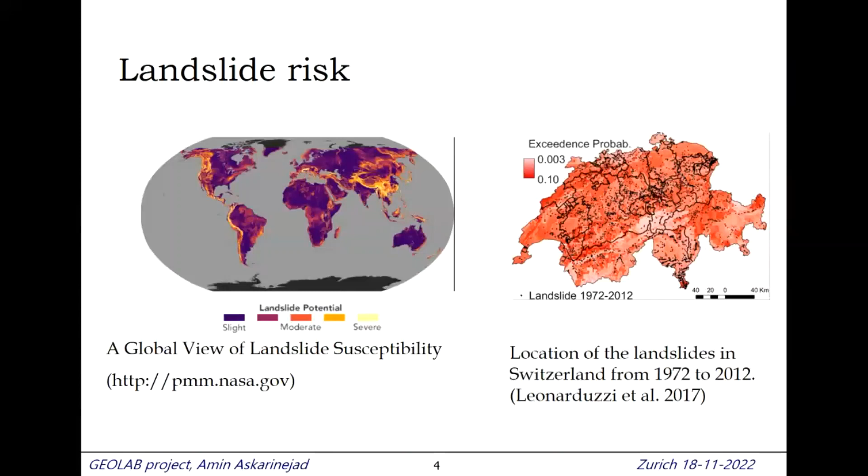With current predictions of global climate change, we would expect, unfortunately, more dots on the maps at a higher rate in the near future, along with the increase of population and attractiveness of mountainous areas for infrastructure or settlements. Therefore, we need a better understanding of triggering mechanisms.

This is an example from Japan where the authorities could predict that this landslide was going to happen, so they blocked the road. Fortunately for us, they also put a camera there so we have footage of this landslide. Because it was predicted very nicely, and they could know the extents quite well, there were no casualties associated with this. I have a YouTube video of that—I hope it works, let's see.

You can see that it's quite a large area that was affected by this, and this road—if the authorities could not predict it well—would definitely pose a huge impact on motorists on the way. Going back to the presentation.

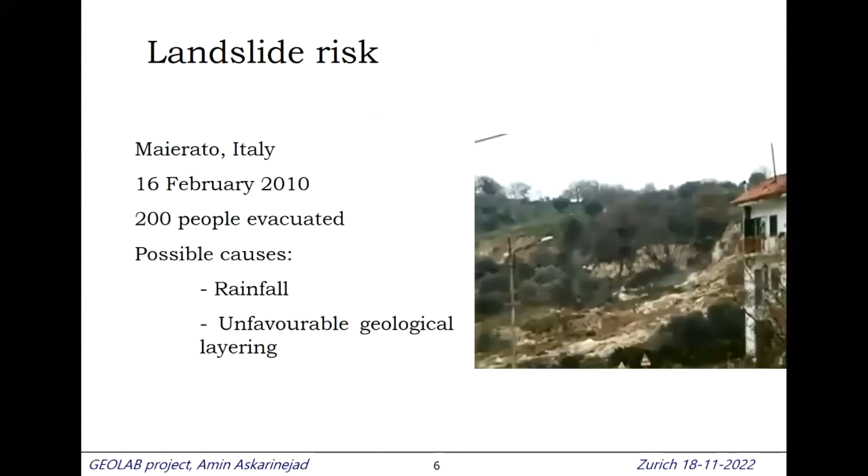The second example, since I just realized the video doesn't work, is from Italy. This landslide caused the evacuation of about 200 people, and the cause was rainfall and unfavorable geological layering. We'll discuss a bit more what these unfavorable geological layerings mean. In very simple terms, a landslide happens when the driving forces are larger than the resisting forces.

Normally the driving forces are more known to us than the resisting forces, because soil is a complex material, and therefore we need perhaps to work a bit more on understanding the resisting properties of the soil, especially transient unsaturated soils.

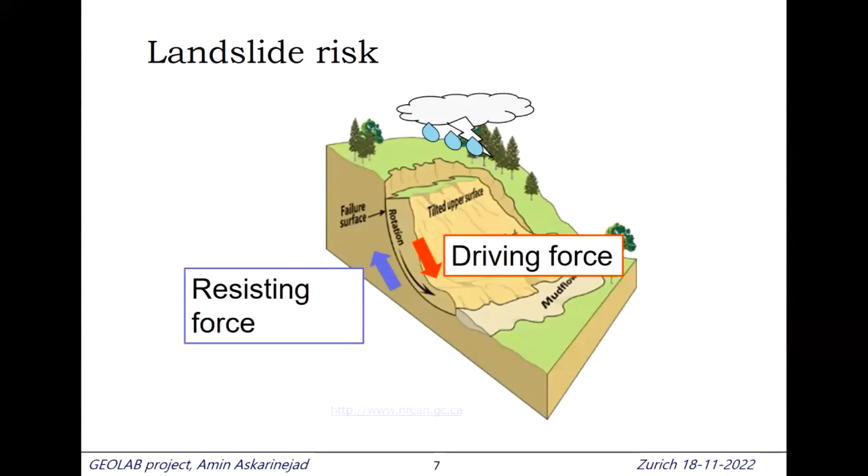Looking at two grains that are below or located under the water table, we have these repulsive forces of pore pressure, basically. These pore pressure forces are acting in all directions, perpendicular to all of these grain surfaces, and in fully saturated condition, this repulsive force works in a way that the two grains are moving away from each other.

So basically, if we look at the definition of effective stress, it's total stress minus pore water pressure. But when we have negative pore water pressure, or the grains are located above the water table...

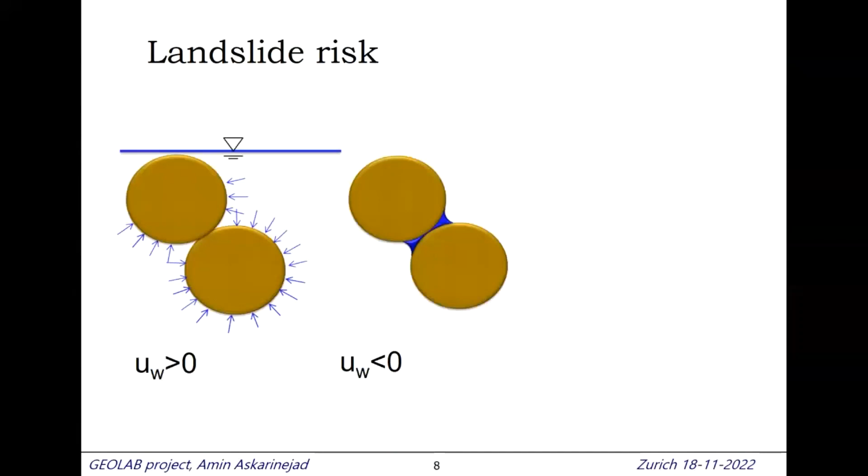This is basically the cause that a lot of the slopes are stable and become unstable when it rains. So when we move from this situation to fully saturated situation...

In terms of equations, or how we can mathematically in a very simplified way describe this phenomenon, you know about the shear strength of the soil, which is a function of effective stress. But in this equation, basically for unsaturated soils, we separate the effect of total stress and the suction.

The first term is basically the so-called total stress minus pore air pressure, and the second term is called the apparent cohesion. This is not related to the total stress; it's purely related to the amount of pore water pressure. And this parameter chi is basically a function of degree of saturation.

A lot of researchers, for simplicity, just assume that this value of chi is equal to degree of saturation. So when it rains, basically, before rainfall, this UW, the pore water pressure, is negative.

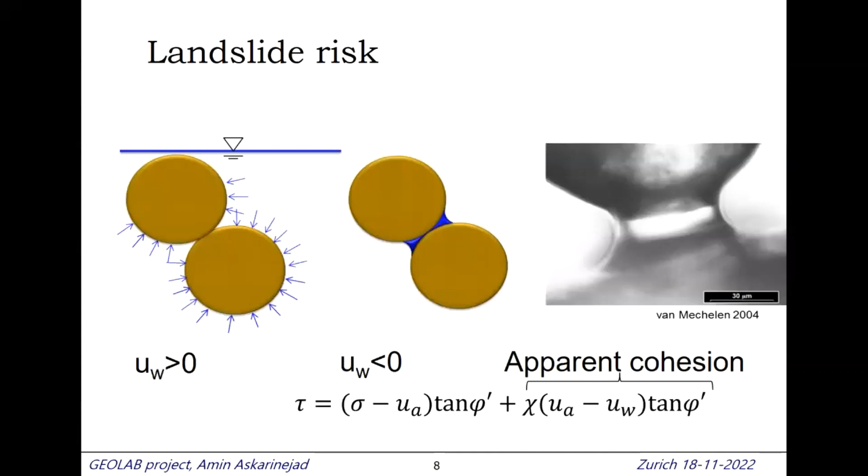But of course, that is just looking at two grains; in reality, we have a very complex situation. So if we want to predict a landslide is going to happen in a region or not, there are a lot of points that we need to look into.

The first one, for example, is that in a lot of cases, we assume that the bedrock is parallel to the slope surface. And in most of the cases, actually, it's not the case.

Also, bedrock, we normally assume that it's impermeable, but not only is it not impermeable, but also sometimes you have this unfavorable geological layering that would have actually some water coming out of the bedrock, and this is called exfiltration.

The bedrock might have a dip in the shape, so therefore you might have some locally saturated zones as well, or you can have some lenses of soil with different permeabilities. Therefore, you have a really complicated interactive system that you need to take into account if you want to make a prediction for a landslide.

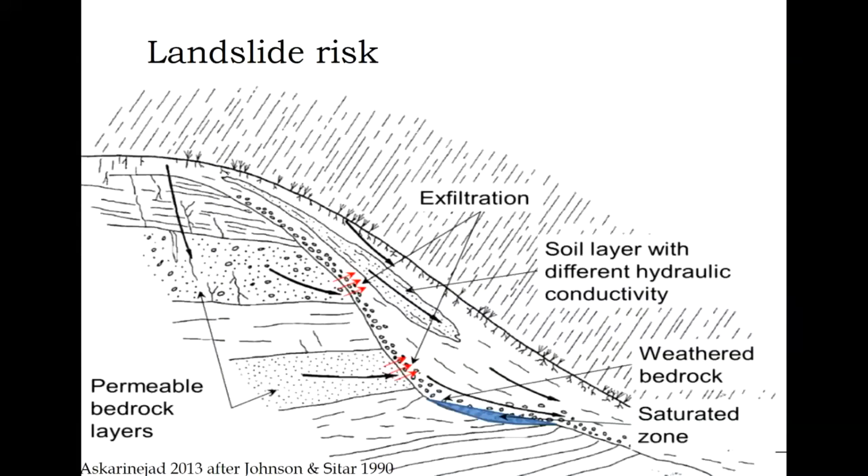So the major questions that in these sort of studies we need to take into account: firstly, what are the hydromechanical responses of the ground to rainfall? So if you have a slope, by hydro, I mean how the pore pressures change, and mechanical means how the effective stress and hence the shear strength changes, and also maybe some volumetric changes.

The second question, especially important for authorities, is that can we have some indications of the failure before it fails, of course. Not only indications about the time, but also indications about the volume and also the runout.

So about the timing, there is a lot of research that you might be aware of, this keyword early warning system, that is basically based on measurements and understanding the soil behavior to interpret those measurements.

Then a bit more on the interactions: what I mentioned about the geology and hydrogeology interactions with the soil mantle is important, and also what recently, I mean since a couple of decades ago, but recently, maybe during the past 20 years, has taken up is about the effect of vegetation.

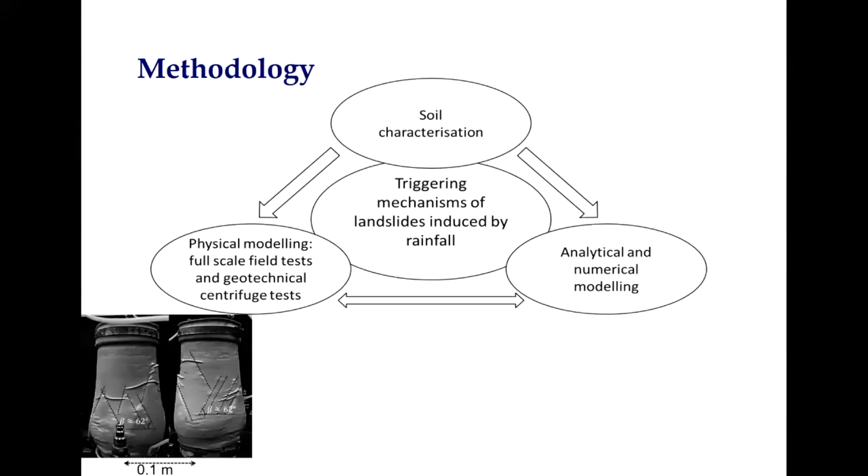Soil characterization can be done in many ways. What I did was use a large triaxial test done together with Alex Marin, who is here—he actually took these pictures. Then we can perform some full-scale tests, which I'm going to talk more about. We can also perform centrifuge tests, and of course, some numerical modeling.

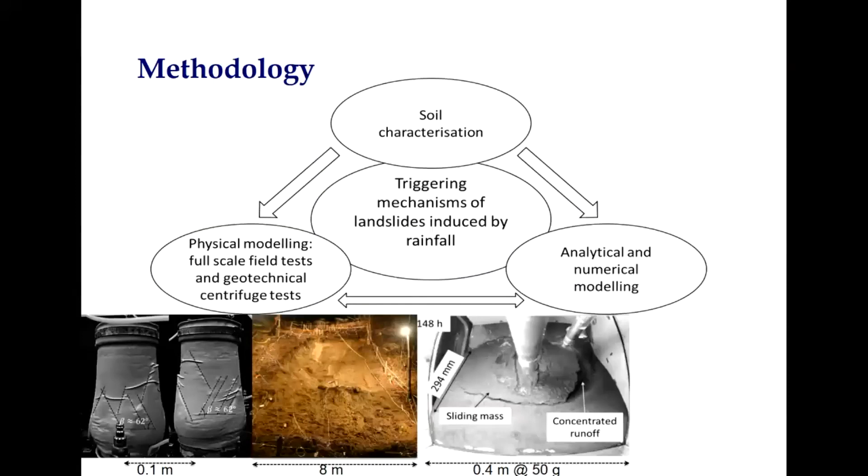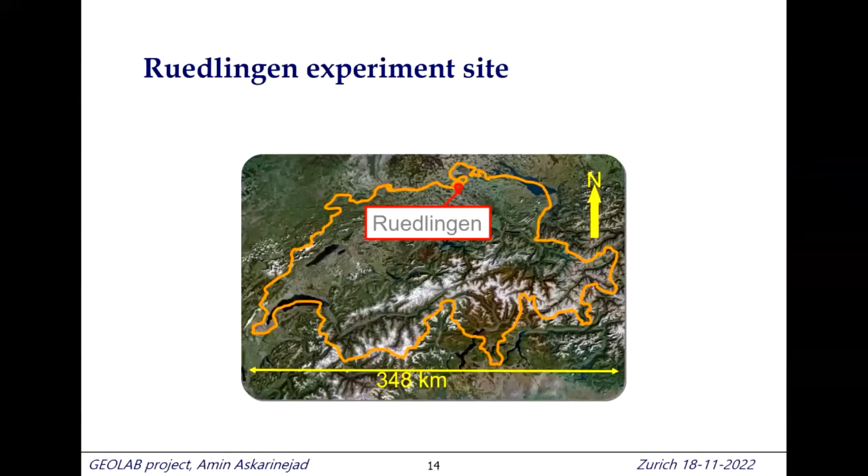So let's have a look at the field experiment. We chose a slope located in the northern part of Switzerland, in the beautiful canton of Schaffhausen, at the banks of River Rhine. This is an aerial photograph of our test site, showing the River Rhine flowing from the canton of Graubünden all the way to Germany.

You can already see from this figure that there are some signs of movement in this region. The Rhine has eroded the toe of these slopes, and therefore you have some retrogressive landslides—you can see this depression close to the village called Buchberg on top there. You can see signs here and some others here, and also signs of shallower landslides along this very beautiful hiking route. If you are here tomorrow and the weather is good, I can really recommend having a look.

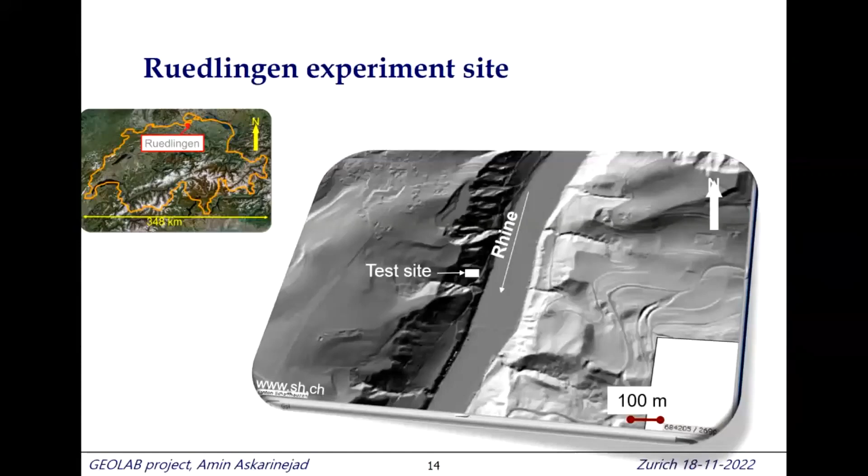Some more obvious signs of movement in this region: you can see that the trees are not always vertical, and this is a sign—you can see that they are bent, which shows that the base has been moving downward. So it's a creeping slope along the banks of River Rhine. Or you can see outcrops where the bedrock has been exposed, meaning the soil on top has slid down.

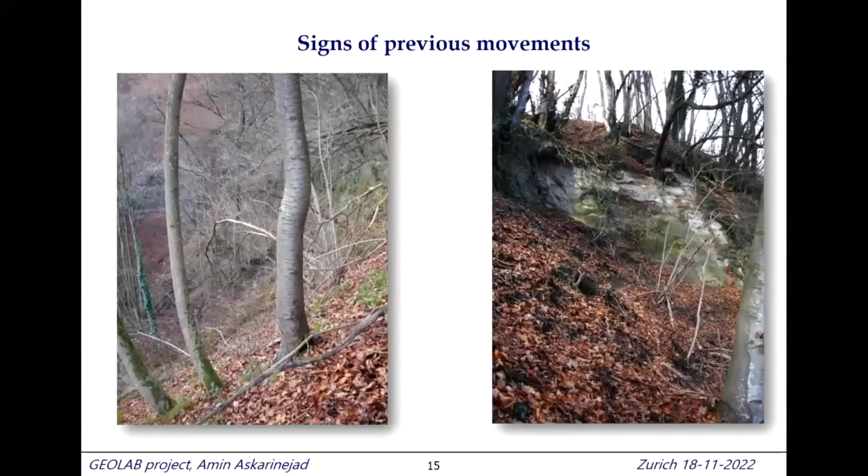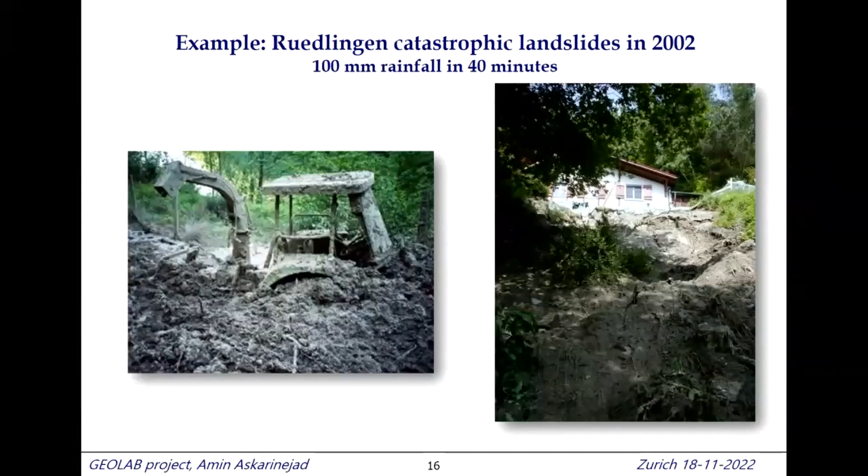Some very obvious signs of previous landslides—for example, this is a landslide, or series of landslides, that happened in 2002 in this region after 100 millimeters of rain over 40 minutes. This was really an extreme case, and you can see some cracks at the base of this house here, and some mudslide occurring in this region.

Starting with the first part, soil characterization: the first thing we did was go and take some completely disturbed samples and do a grain size distribution. We took samples from different depths of this slope—I'll explain which slope it is, but it's in Ruedlingen. According to the unified soil classification system, it's medium to low plasticity silty sand.

We performed a couple of conventional consolidated drained triaxial tests, and the constant volume internal friction angle was measured to be 32.5 degrees. I also performed some more advanced stress paths, which I'll explain in more detail, and the internal friction angle at failure was measured to be 36 degrees.

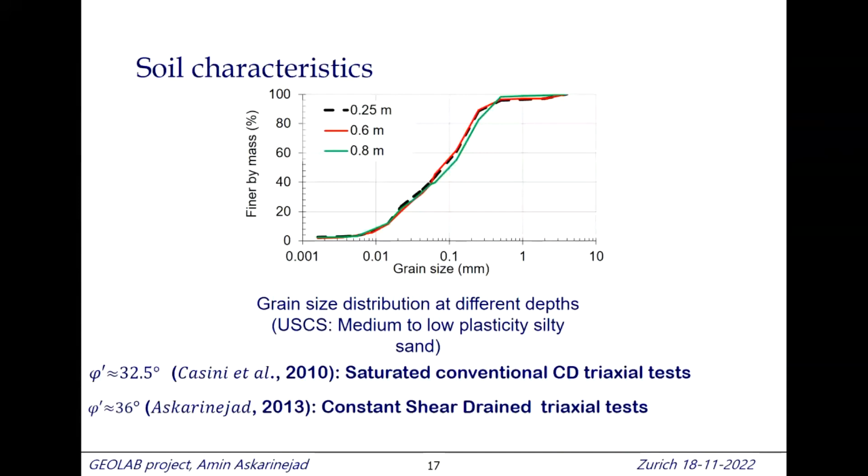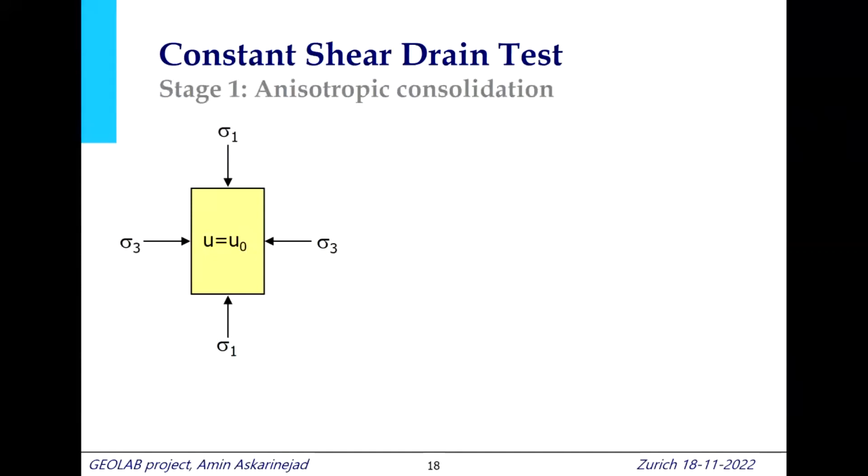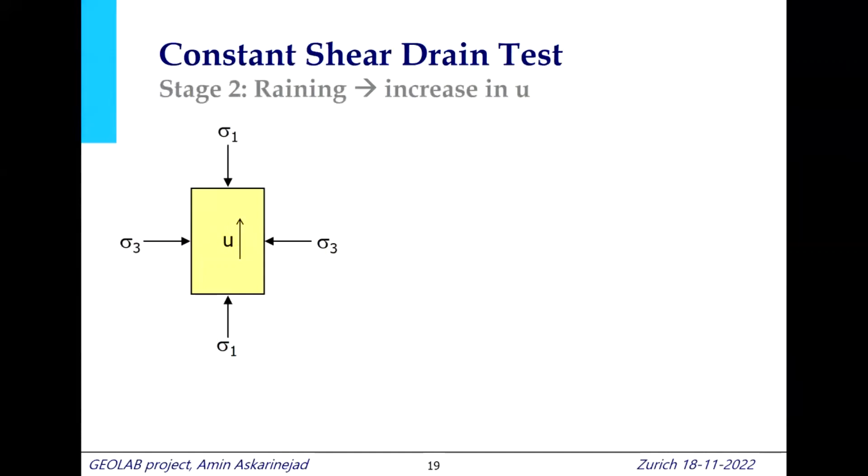For these advanced stress paths, let me explain shortly what I mean. When you have an element of soil already in a slope, it experiences shearing—it's not failing, but it's not without shearing either. Therefore, to prepare your sample, you need to consolidate it in an anisotropic way, so you already have sigma 1 different from the lateral stresses. To simulate rainfall, you simply increase the pore water pressure in your sample while keeping the boundary conditions in terms of stresses constant.

So maybe I'll ask the public a question: what happens to this Mohr circle when we are simulating this rainfall in the triaxial sample? Does the radius change? Does it move? The radius does not change—pore pressure changes, as we are injecting water to simulate the rainfall.

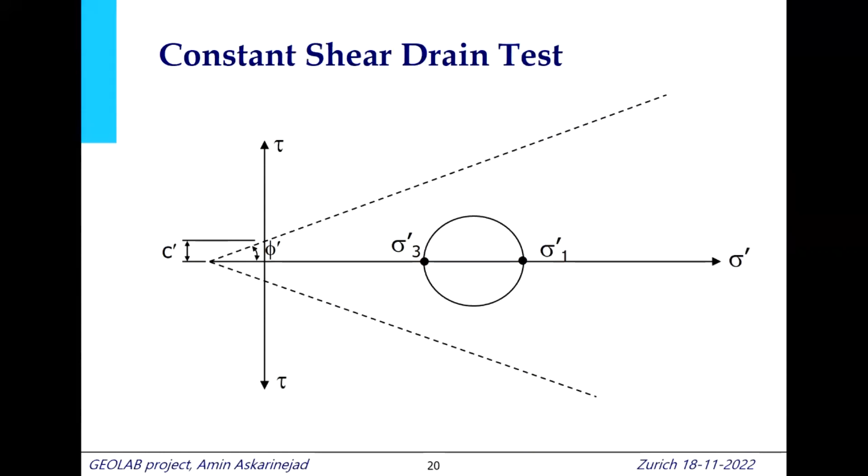The total stress remains the same, but it's moving. It moves to the left, because we are increasing the pore water pressure, so effective stress decreases. We expect that these Mohr circles in this tau sigma dash space basically move to the left.

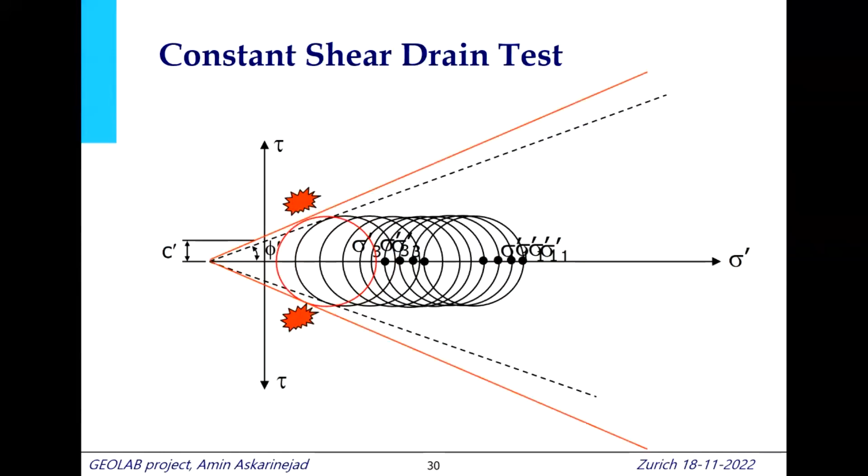According to previous conventional triaxial tests, we expected this stress state to fail as soon as it touches the failure envelope with a phi dash of 32.5 degrees. But surprisingly, it didn't fail, it went a bit further. Because of the lower stresses, we have a tendency for dilation, so the slope was actually a bit more stable.

I had prepared another question, but I leave it for you. Anyway, I'm going to explain it. So to look at this in P-Q space, I've drawn the results here. P dash is the mean effective stress, the average of sigma 1, sigma 2, and sigma 3 — sigma 2 and sigma 3 are the same in the triaxial condition — and Q is sigma 1 minus sigma 3. Starting from this initial point, we increase the pore water pressure as the rainfall progresses, and this red dashed line is the envelope or failure criterion from the CD test, the conventional consolidated drained triaxial test.

We see that both samples, one a bit looser than the other, went beyond this failure criterion and then failed, both more or less at an eta failure of 1.47, equivalent to a phi dash of 36 degrees. This is indeed because of the lower effective stresses and the tendency for dilation.

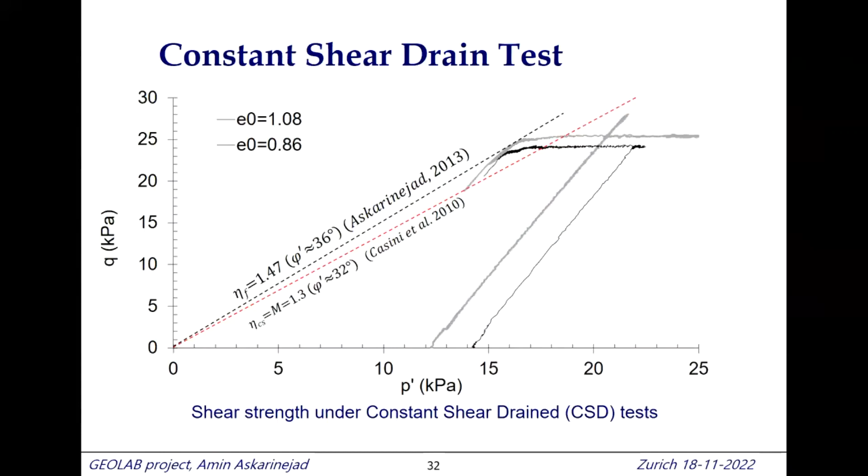Unfortunately, I don't have much time to explain the soil characterization, but at the end of the presentation I've listed some references for those interested. For this sort of question, the hydraulic properties of the soil are very important — for example, unsaturated conductivity or water retention curves that we measured — but due to time constraints, I can't explain now.

This is the slope that we chose to fail in order to induce this artificial landslide. It has a width of 8 meters, an on-surface length of 30 meters, and an inclination of 38 degrees.

Just by limit equilibrium conditions, this angle is higher than the internal friction angle, either 32 or 36 degrees. So it should not be stable according to classic soil mechanics, but it is stable, and we wanted to know why.

On the right-hand side you see the geology. We performed some geophysics and mechanical tests to look at the shape of the bedrock, and you can see the bedrock is actually laterally inclined. Looking upwards, on the right-hand side it's shallower than on the left-hand side. We also realized there were some features in the bedrock: a so-called buttress at the base, an accumulation of old rocks, and also a permeable layer that you'll see later on. We didn't know this existed here.

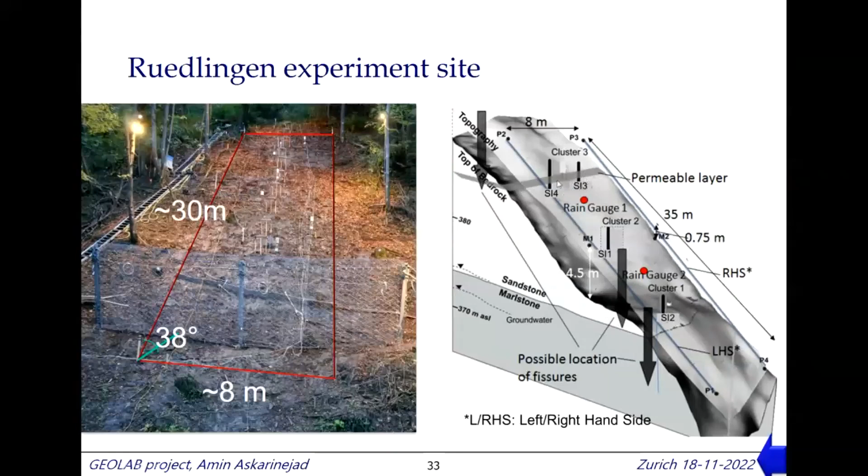We performed some monitoring. Suzanne mentioned TDRs, time domain reflectometers — these are excellent and simple instruments to monitor the evolution of the degree of saturation of the sample, or not exactly degree of saturation, but volumetric water content. If you know the porosity, you can calculate the degree of saturation.

We installed these sensors in three so-called clusters, TDRs from a depth of 15 to 150 centimeters. Using tensiometers, we measured suction at exactly the same horizons. We also measured the surface and subsurface deformations — I'll come back to this a bit later.

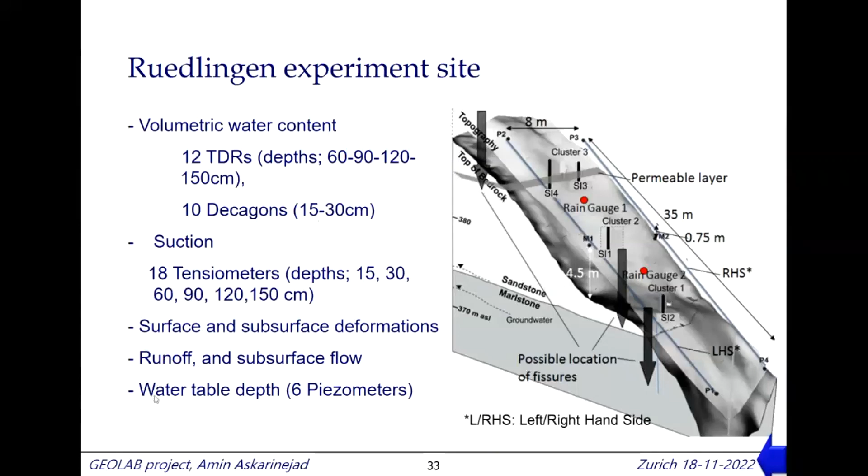We also measured how much of the water we artificially rained is going into the soil and how much of it is runoff. And then we had also installed piezometers.

This is the slope before we did the rainfall. You can see we put these pedestals here with sprinklers, and a huge body of cables running around, all going to this data logger here. A bit about the geology.

So here you can see the general geology of this slope. On the upper part, we have the so-called upper seawater molasse, and on the lower part, we have the lower freshwater molasse. Basically, it's sandstone with some marlstone, so clay layers.

And in the lower part, we saw quite large joints because when the river Rhine was flowing, it decreased the sigma 3, the lateral confining stress, and these joints opened up. Sometimes the joints were around 10 centimeters in width, so they can really work as a very good and efficient drain into the geology.

Also here on top, because we have a change in the geology and the permeability of the layers, you could expect some water coming out of the slope. In winter, in January 2009, when I went to visit the slope, I could see really one horizontal layer of ice forming at the interface between these two layers, the upper seawater molasse and the lower freshwater molasse.

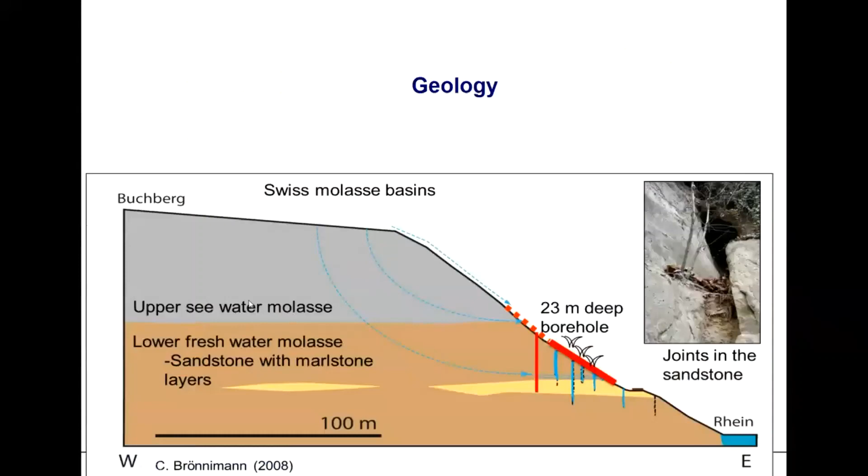To confirm that, we performed some geophysics, so electrical resistivity tomography. And the figures, or the colors that you see here, basically are the values of electrical resistivity of the material.

Electrical conductivity is dependent on two parameters in the soil. One of them is the amount of water that is in the soil. The other one is the amount of ions that you have in the soil. So if the soil is more saturated, then you would have lower resistivity. And if the soil has more ions, for example if you have clay, then you would also have lower resistivity.

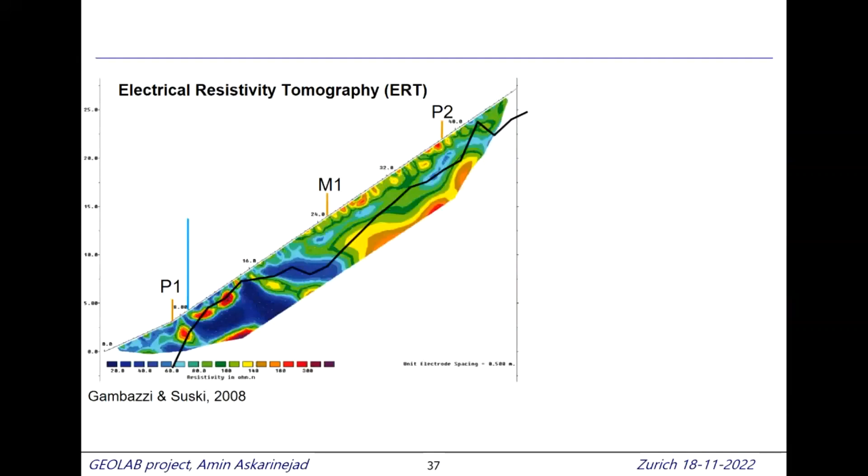So here, when we look at this figure, we can see that the upper part has a bit higher resistivity, and in the lower part, we can see that there is less resistivity. This is the area where basically the marlstone was intruded into the sandstone, and then there was some extra intrusion of the sandstone into the marlstone as well.

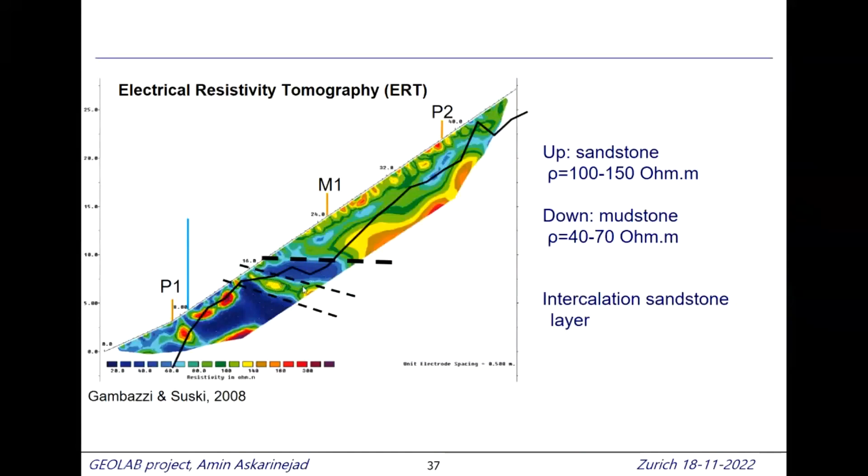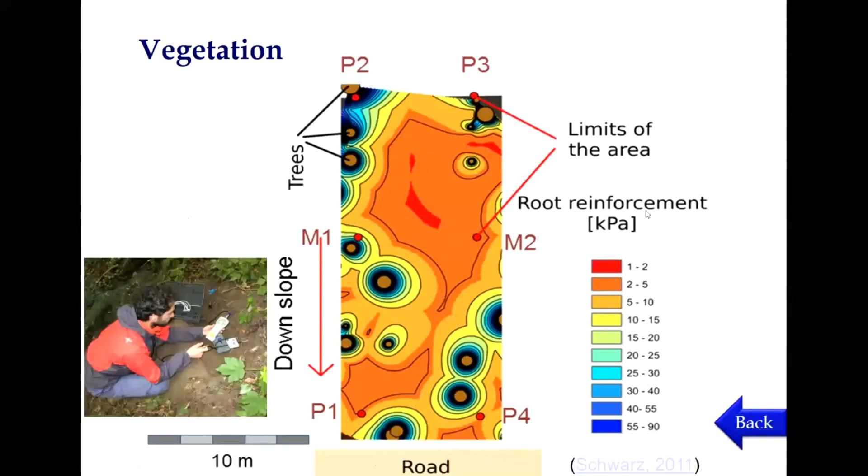One of our colleagues, Massimiliano Schwarz, who is now a professor in Switzerland, did a very good job characterizing the root reinforcements at different locations on this slope. He developed a device that could basically pull the roots and measure their tensile resistance, and so he mapped the root reinforcement on this slope.

One of the important points I explained at the beginning is about the early warning systems. Early warning systems basically work based on measurements, and one of the very important measurements is the displacement. What we wanted to know is how much volume would be mobilized when we have a failure, which means we need some subsurface measurements of the displacement.

And in order to know that, we need to have a sensor. The conventional method is to use slope inclinometers, where you have a casing and you put a trolley which has an accelerometer or tilt meter installed on it. Every now and then, when you are driving it, you stop and measure the tilt. This is a very accurate measurement, but it's manual and very slow.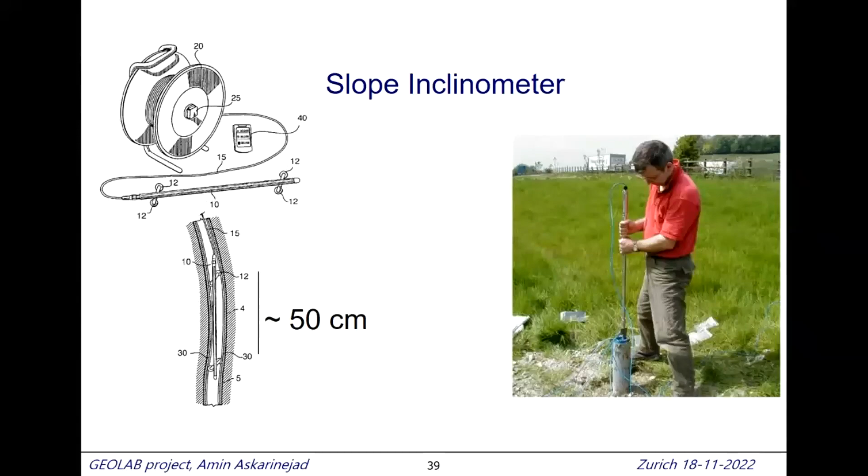When we look at previous experience about landslides in silty sand material, for example this case in Japan, Professor Ochiai, about 4 years before our experiments, did this amazing experiment on the hills. They saw that within 3 seconds, the soil moved 17 meters, so very fast movement.

Also, Andy Take in Cambridge, in the same year, on more or less the same material, performed some centrifuge tests, and they realized that actually their high-speed camera was not very high speed, so they could not detect the movements of the grains very easily.

And also in 2006, 2 years later, Professor Picarelli in Napoli performed some tests, and they also saw some immediate and very fast movements.

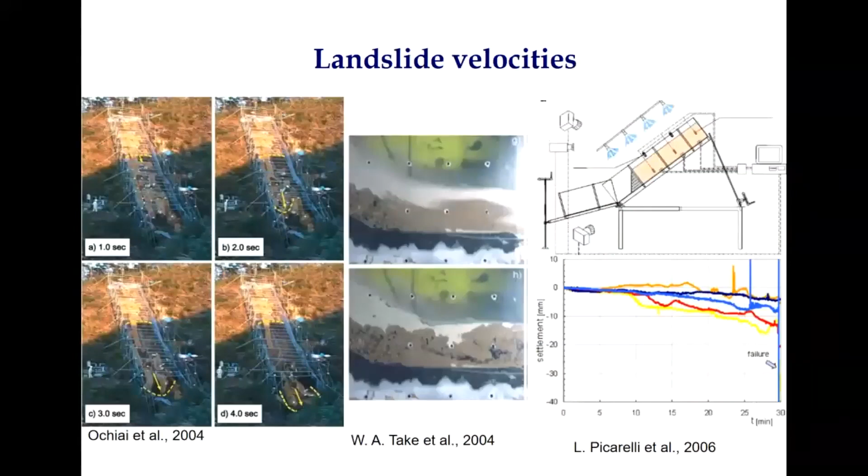So what these experiences told us was that a normal inclinometer is not going to work, for this soil which is silty sand. We realized that the normal slope inclinometer is not the way to go, because I didn't want to be on the slope when it wants to start failing. So what we did was...

We developed a sensor called the slope deformation, or soil deformation, sensor. It's very simple: basically a flexible aluminum plate, and along it we installed pairs of strain gauges. The lower part was fixed with mortar into the bedrock so that it gives us a mathematical fixed point, so there is no rotation, no displacement. This way we could make an integral of the bendings, and knowing the bendings, we could basically get the subsurface deformations.

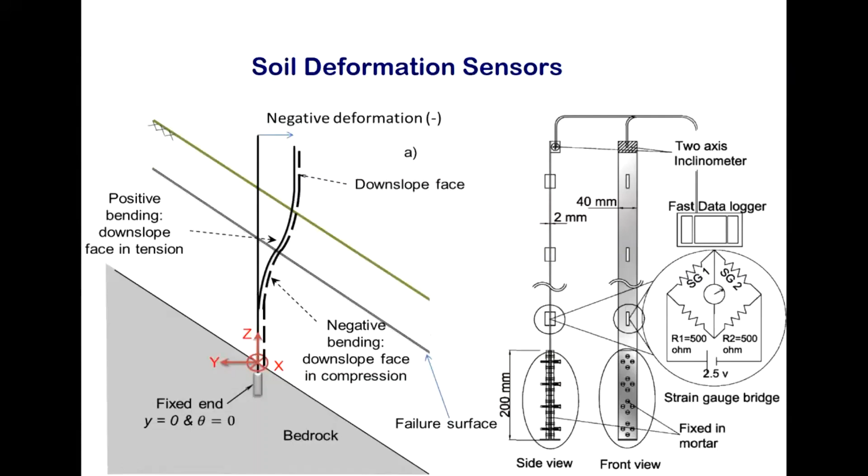Knowing the bendings, theoretically, we would say that negative bending is when the lower fibers of the cross section are in compression. When we have a change in sign of bending from negative to positive, that is more or less the location of the failure surface. We performed some large scale tests in the lab and could confirm this hypothesis.

Maybe I already explained this, but the one thing I forgot to mention is that we measured at very high frequency - 100 samples per second from 4 soil strain inclinometers from each of these strain bridges.

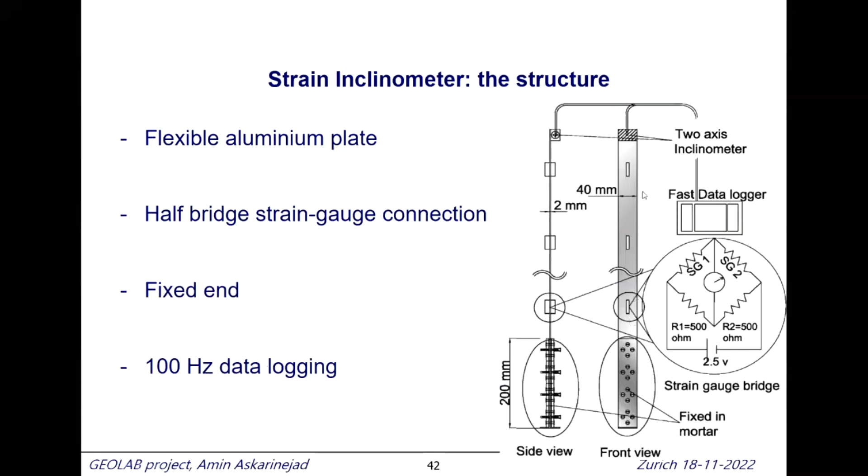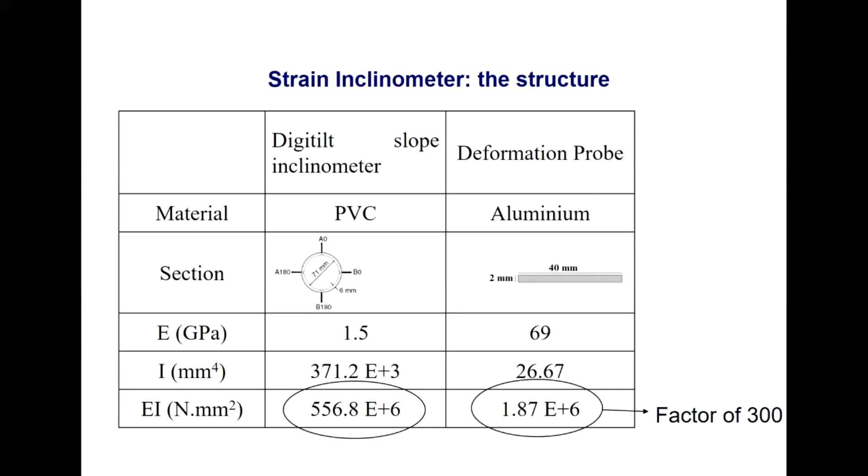In terms of bending stiffness, if we compare this deformation probe with normal casing of slope inclinometers, we see that it's more flexible by a factor of 300. This means you can actually detect much finer movements in the slope compared to normal slope inclinometers.

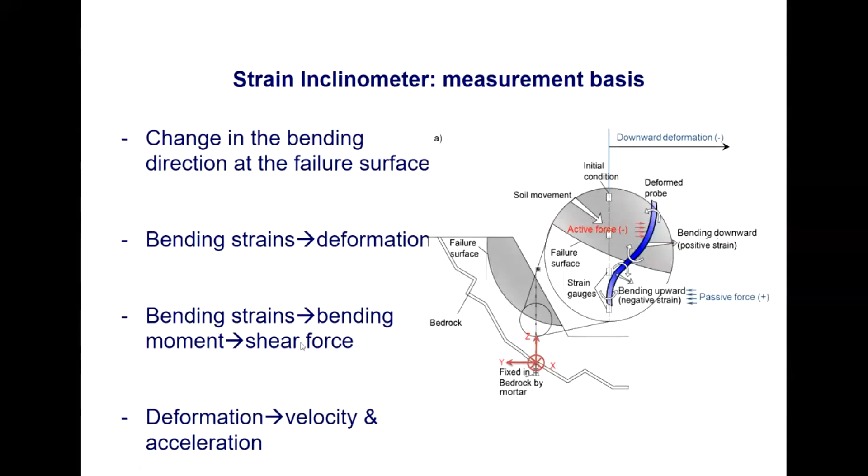Also, one point worth mentioning is that with bending strains, knowing one fixed integration point, we can calculate the deformations. Knowing the deformations, you can get the velocities and accelerations.

In October 2008, we went to the field and started with water, applying a series of drying and wetting cycles, as Susan mentioned, on this soil and slope, with really strong intensities. For example, we went all the way to 65 millimeters per hour, but just for a couple of minutes, to simulate intense rainfalls.

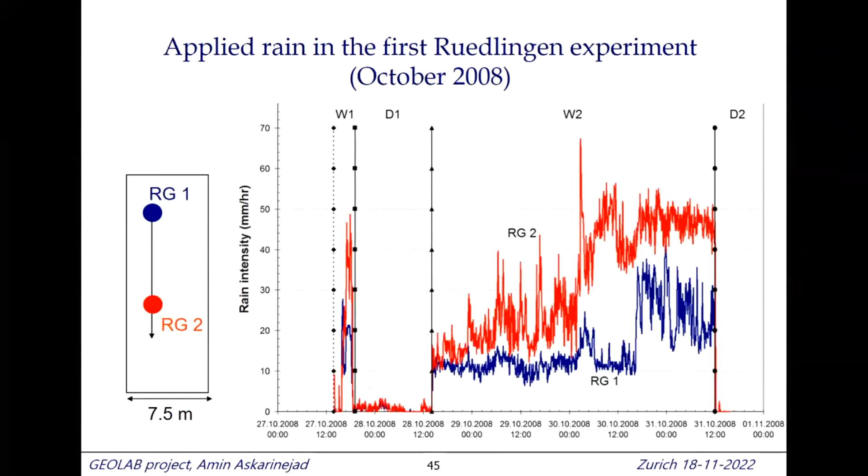It was really an informative test. We gathered really high quality data, but it was very disappointing because there was no failure. We had promised the Gemeinde, the community, that we would make a failure happen in their garden, but it didn't work. So it was a bit of a disappointment.

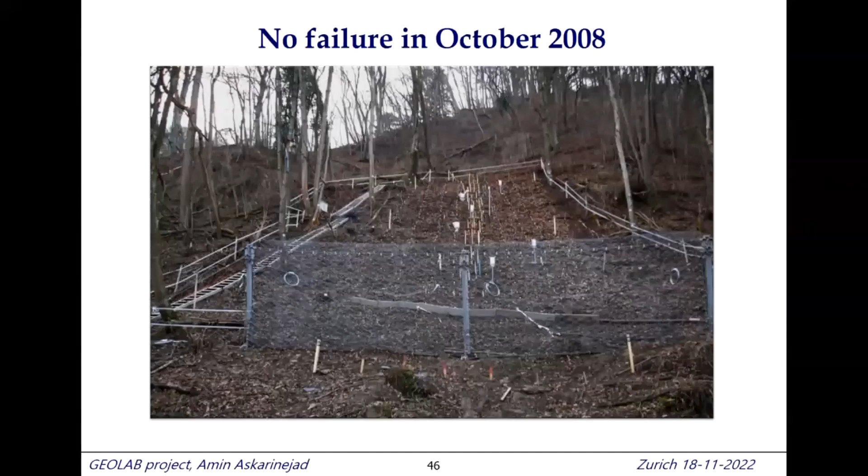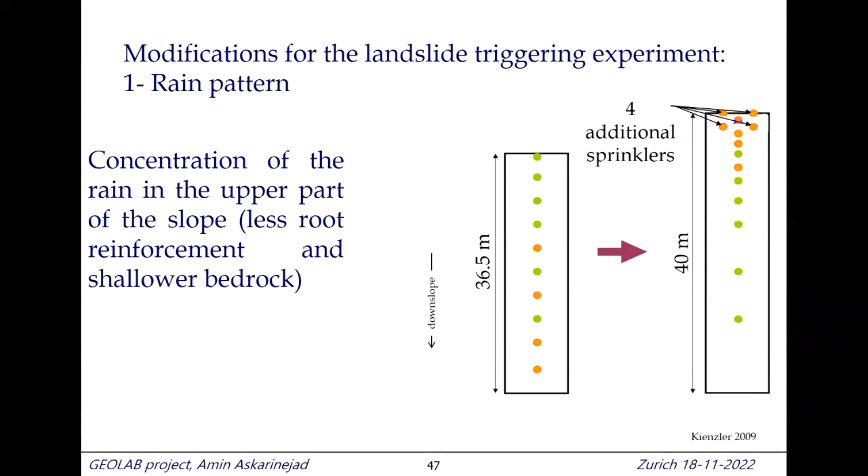A lot of thought went into what went wrong, or what could have been done better. We realized it would be better to put the sprinklers on the upper part of the slope, because the water source was on top, but the sprinklers had discharged more water toward the lower part, where we had more roots, more root reinforcement, and a lot of fissures in the bedrock. That was the first thing we changed.

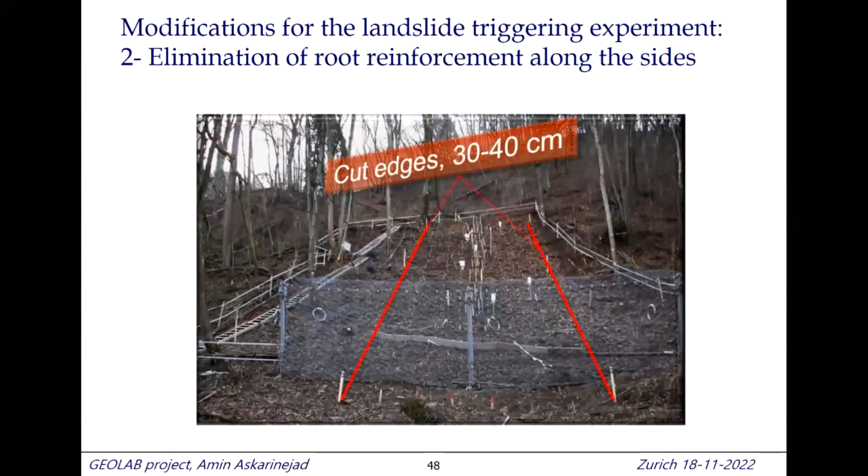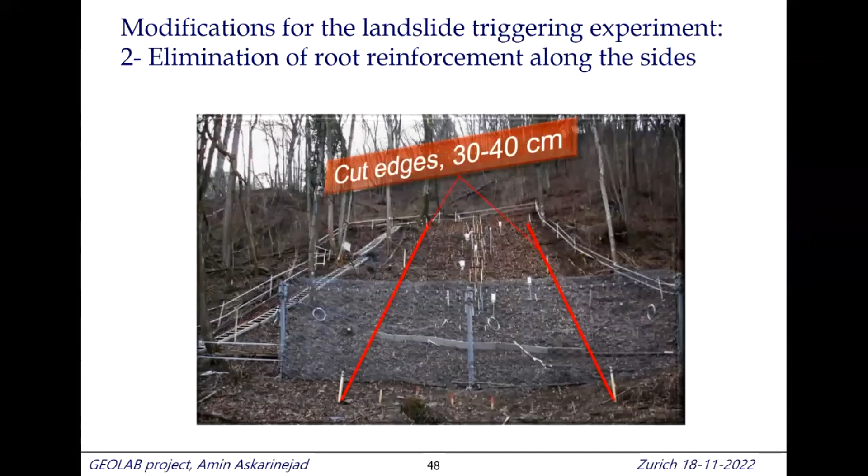The second thing was that there are a lot of trees along the perimeter of this slope. So we went with a shovel and cut the tree roots along the longitudinal edges of the slope, to have a more plane strain condition for the first 30 to 40 centimeters of the slope. Then in March 2009, we went again with a lot of energy, and this was the result.

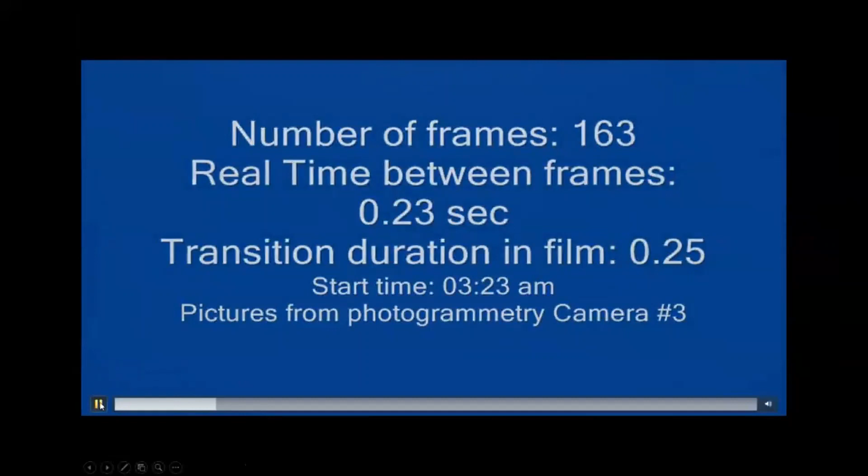Let me explain what we see here. This is from one of our photogrammetry cameras installed on tall trees in front of the slope. This area is the down slope, and this is the upper slope. You can see that the sprinklers are now more concentrated on the upper part of the slope.

We needed to put these styropor spheres, markers, stuck into the ground to have points to track using these photogrammetry cameras. Also, this line here is a dynamic electrical resistivity tomography line - we had electrodes every half a meter, and injected voltage to measure the evolution of resistivity, which indicates the evolution of saturation inside the slope, to have redundancy in saturation measurements alongside the TDRs. So let's see what happens.

This is just a couple of seconds before the failure. You can see that the failure started on top, as we had expected, because the bedrock was shallow and there was less root reinforcement there. It comes in steps, and then it suddenly accelerates, and of course it pulls all of the cables, so we lost some of the last measurements before the final failure.

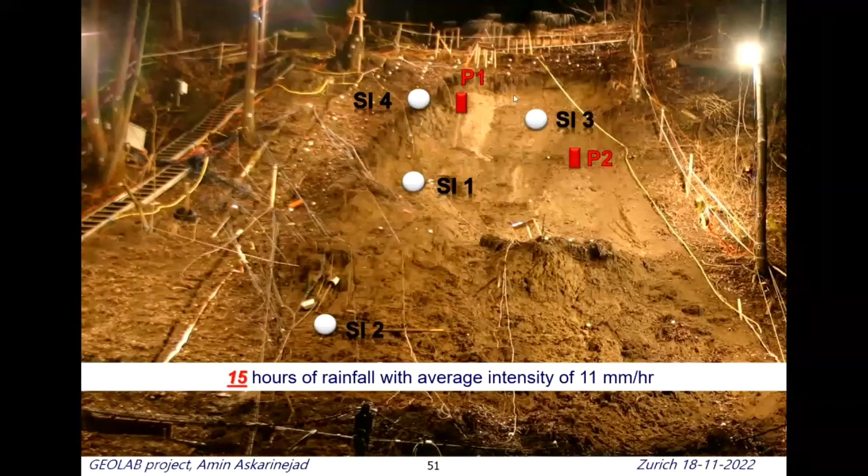I have a bit higher resolution photo. These were slow but high quality images that we took. These are the locations of the strain inclinometers installed on the slope, and the same figure when the failure happened shows water coming out at these locations.

Let's have a look at the results of one of these strain inclinometers that we gathered and installed. The y-axis is the depth, and the x-axis towards the left is the amount of deformation.

We started rainfall at about noon on 16th of March 2009, and until about 3 hours later we didn't see much meaningful deformation. The first real deformation happened at midnight, about 12 hours after the rainfall started. The failure was most probably at a depth of about 50 centimeters, a very shallow failure. This kickback is basically an integration error due to the stiffness of the sensor.

At about 1:30, or 13.5 hours after the start of rainfall, a huge, very strong, deeper failure surface evolved, and you can see a pretty clear shear band forming at this depth, at about 1.4 meters from the soil surface.

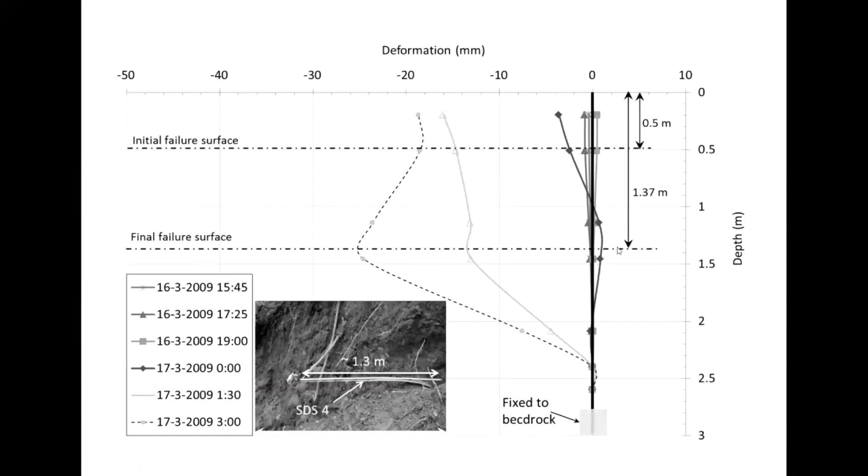The day after, I went to make sure, because all of this is based on strain measurements, I looked at the sensor, and it was in fact bent at the location predicted based on the strain measurements.

So the pore pressure decreased, which is in line with what we saw in the triaxial cells as well, that the sample or element we tested showed a dilative behavior at very low effective confining stresses. But because the rain is still running, the decrease in pore pressure due to dilation cannot increase the strength enough, and we got a failure anyway.

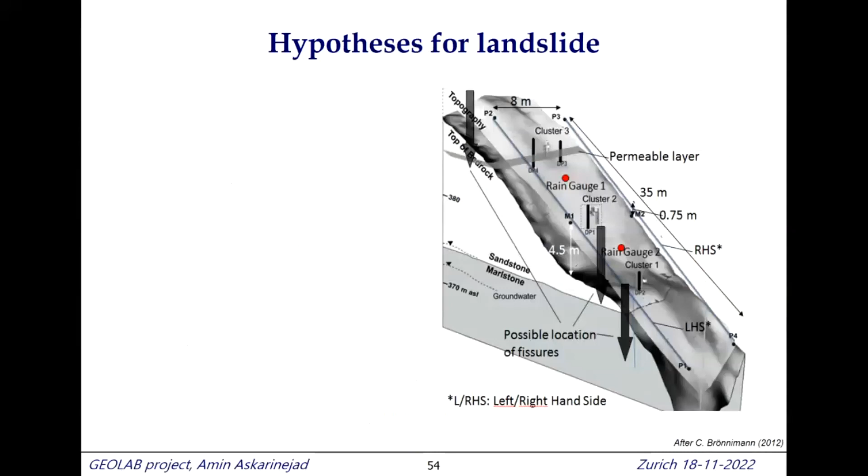This could be one of the indications for an early warning system, since about 2 hours before the main failure, this happened. So basically, this was the first physical modeling I wanted to discuss.

What we learned from this, and what other points we can further discuss using centrifuges: first, the bedrock is not parallel to the soil surface, there is an accumulation of old boulders at the base. In the first experiment, we saw that the concentration of water was actually in the lower part, where we have this so-called buttress effect of the bedrock.

So we wanted to quantify this effect with the centrifuge. The second thing is about the drainage into the bedrock, the third is the effect of the roots, and the last is about exfiltration from the bedrock.

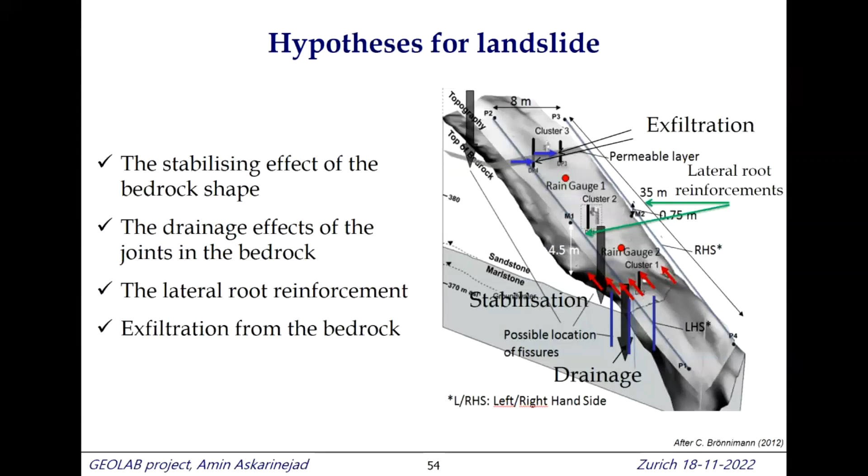So for the centrifuge, this is a sketch from that time, the best I could do with AutoCAD. My AutoCAD skills weren't that good, but it gives you an indication. We wanted to make a slope of 38 degrees.

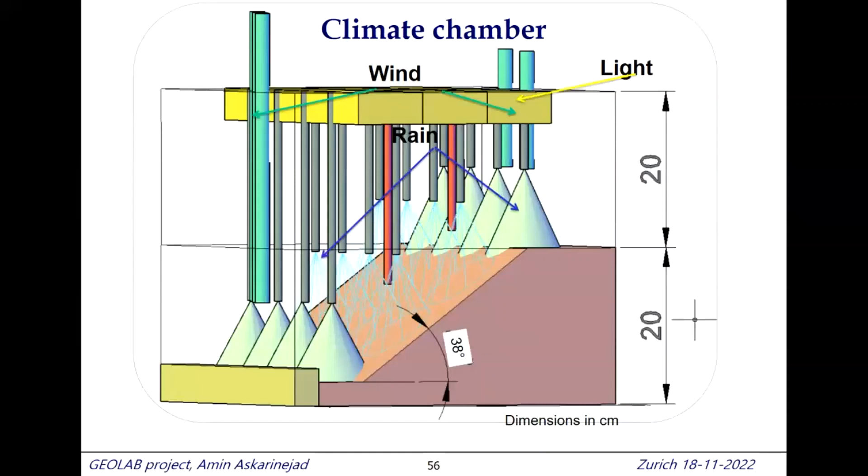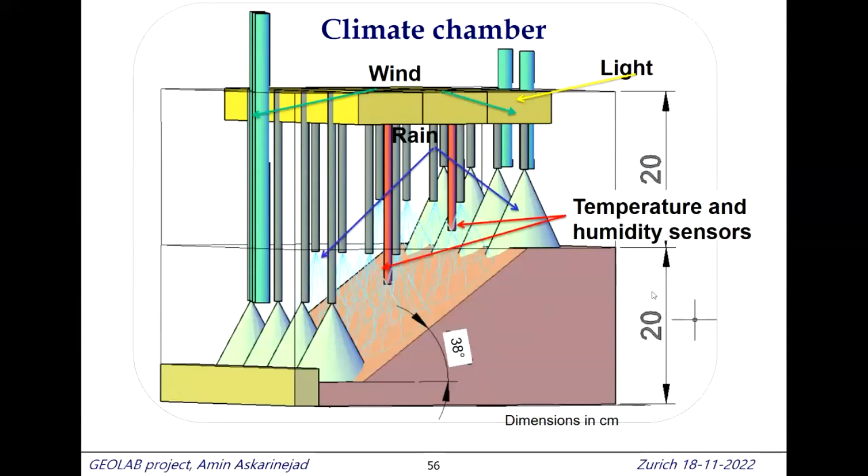We wanted to apply rainfall, and also cycles of wetting and drying to this slope. So we applied rainfall, and we could simulate wind to promote evaporation. We had lights, again, to promote evaporation and also give enough light for our cameras. And we also measured temperature and humidity.

I performed the tests in the drum centrifuge here at ETH. I don't know if you had a chance to see that. No? Yeah, so this is the drum centrifuge.

It's closed there. Drum centrifuges are excellent, but they have one tiny but very important issue: you have this 1G from the beginning, and if you want to install your sample, you need to, from 1G, rotate it and then put it on this channel. We have really excellent technicians. The lead of the centrifuge is Markus Iten, and he found a very good way to overcome this.

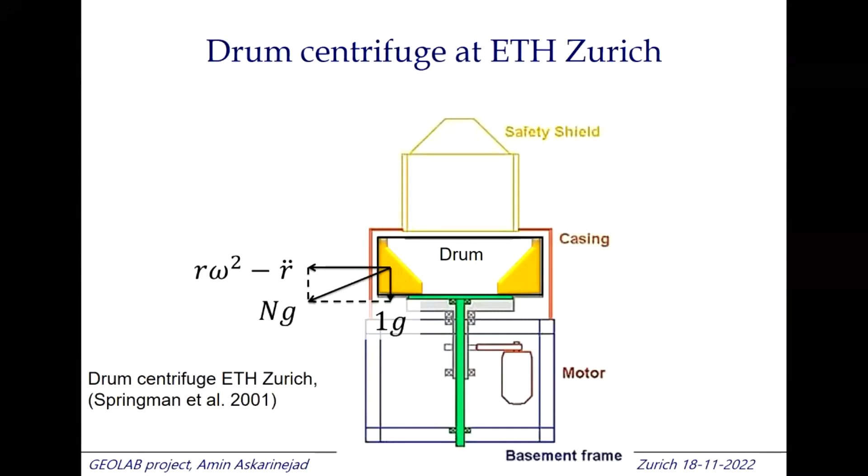In order to simulate rainfall in the centrifuge, I needed to do quite a lot of modifications. The first one was that I needed water, so I needed to build a central water tank in our tool table. Then I needed to pressurize it to make sure I have enough flow of rain, or intensity of rain. There were some other very complicated electronics and valves that our electrical technician Ernst Bleiker really helped me with.

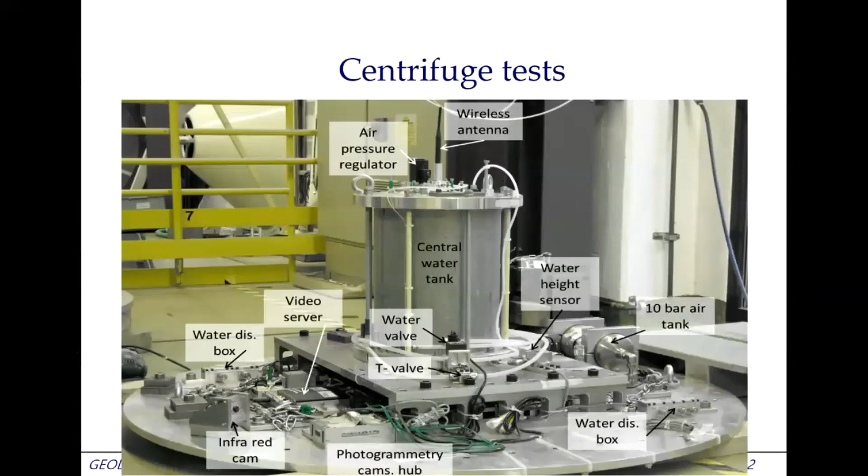And this is how it looks like in the centrifuge. So I have these two already 90-degree tilted boxes with the slope inside, and this is the tool table.

I want to just briefly mention what we need to do in order to simulate rainfall in the centrifuge. This lower blue box you see here is the original box that we had at ETH. Then I realized that in order to apply rainfall, apply wind, and also do measurements, I needed some extension. So we designed these extension pieces.

And then what comes on top is important. So on top we have these two top plates that host the photogrammetry cameras, also the air valves to promote the flow of the wind.

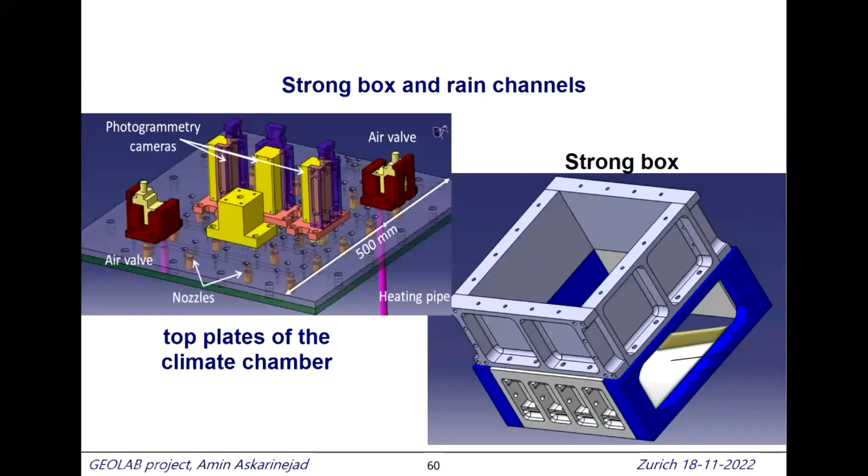We integrated channels to install nozzles and simulate the rainfall. Looking at the detail of this top plate, I designed an inner channel with 4 nozzles. Soon I realized that because of the Coriolis effect, we might need some external channel. So I designed, together with Markus, an external channel with 18 nozzles. By opening and closing these nozzles independently, we could reduce the effect of Coriolis.

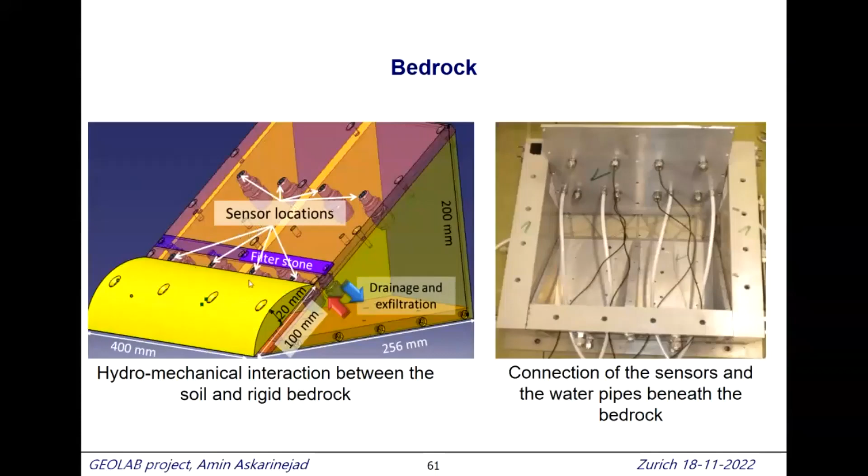One of the major points we wanted to study was the interaction between the bedrock and the soil, so we needed to integrate quite a lot of details into the bedrock as well. We have some so-called exfiltration simulators that could inject water from the back of the bedrock into the soil. We have this semicircular arc of buttress to simulate the uneven shape of the bedrock, and also some sensors to monitor the suction development in the slope.

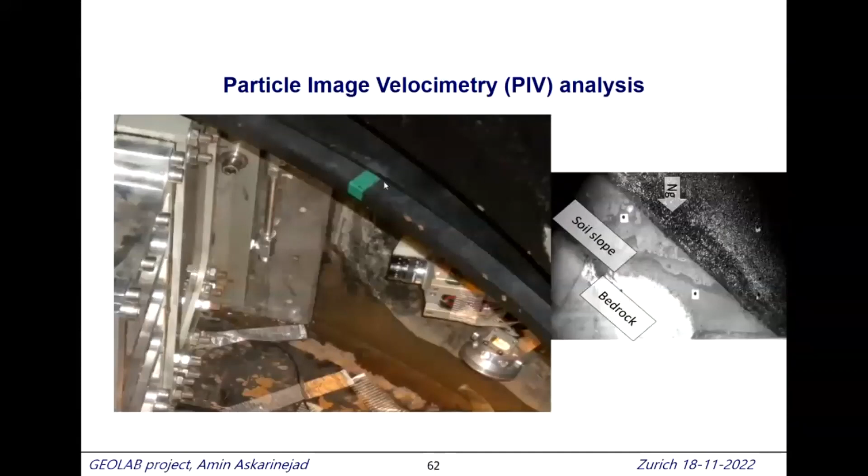Sam, yesterday, I'm sure, gave you all the details about PIV, but we also did some PIV there. What I want to mention is that in the centrifuge, normally for these cases, you have a 3D shape—you don't have a full plane strain failure. So I installed photogrammetry cameras in order to monitor this 3D shape.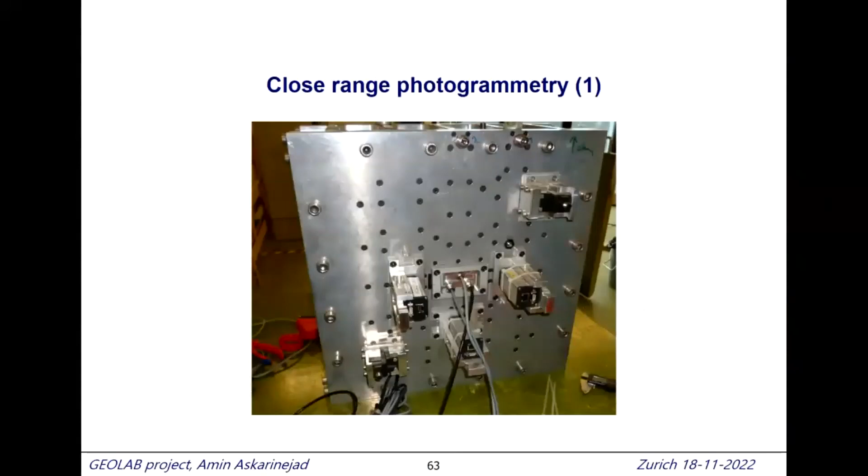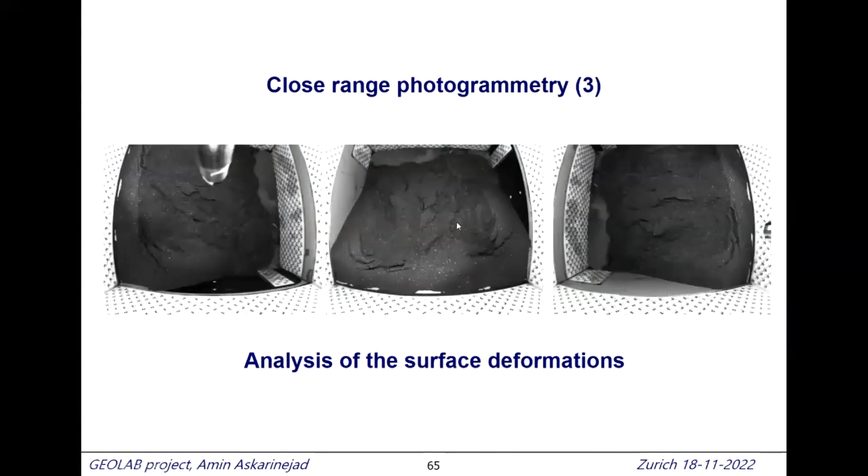It was really a challenge because you need to very carefully get rid of the distortion due to the lens of these cameras. Therefore, we needed to do a series of rigorous calibration of these cameras. This is one of the tests where you can see we have a failure that's not really plane strain—it's completely three-dimensional, and we could get a very good view of the details of the surface when it failed, with all the pictures we took.

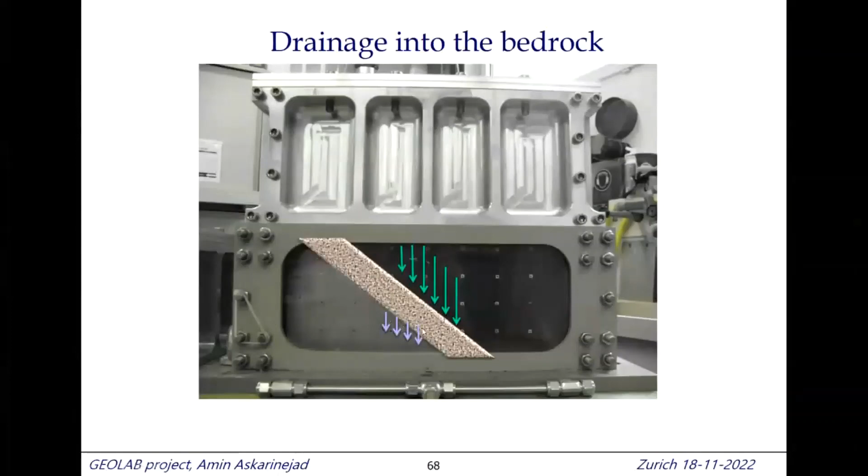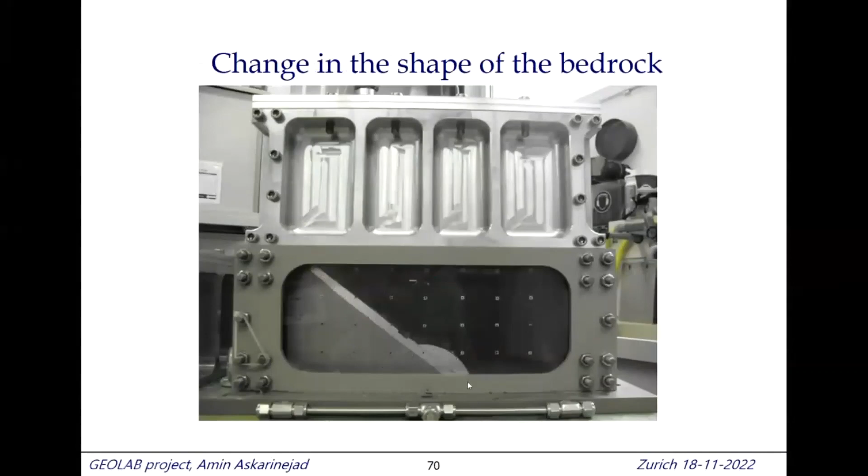So what tests did I perform? I performed a test where the bedrock is parallel to the slope. We opened the channels inside the bedrock to simulate drainage in the bedrock. Then we simulated exfiltration and also different shapes of the bedrock, but unfortunately I don't have time to speak about those.

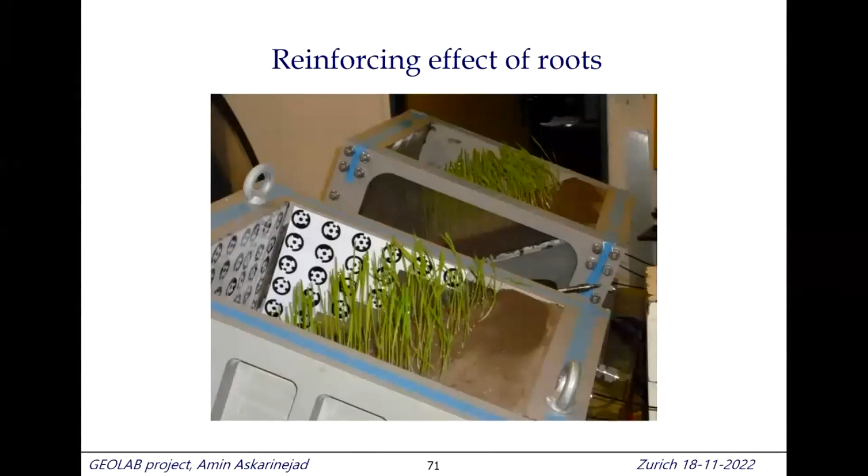So we wanted to know the effect of roots in the soil, the reinforcement effect. What I did was plant roots in a clear raster pattern on the slope, and I studied the roots very carefully. I had about 90 seeds and statistically measured the length, shape, and pattern of the roots. I found that 90% of them had only 3 main roots.

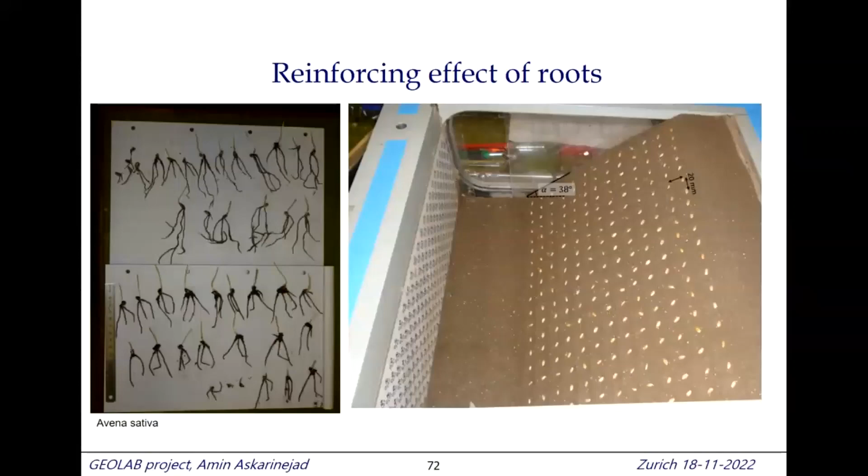At the same time, when I planted and watered them every day under complete controlled humidity, temperature, and light conditions in the same room, I also planted them in a large direct shear box that we have at ETH. Every day I needed to water both of them, and on the same day I performed the shearing on this sample and also in the centrifuge.

Because we are dealing with biological effects here, we needed to minimize all of the side effects we can have. So very short detail about the root reinforcement: basically these root reinforcements add to the shear strength of the material, and we can show it by an increase, a shift upwards of the failure envelope.

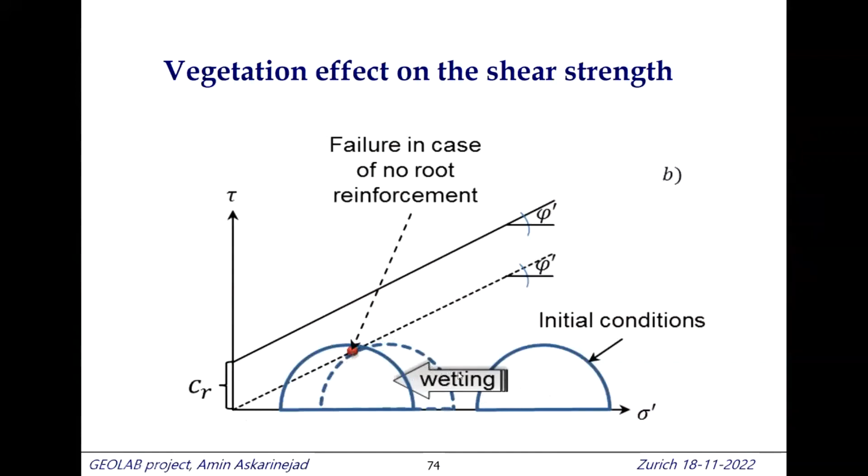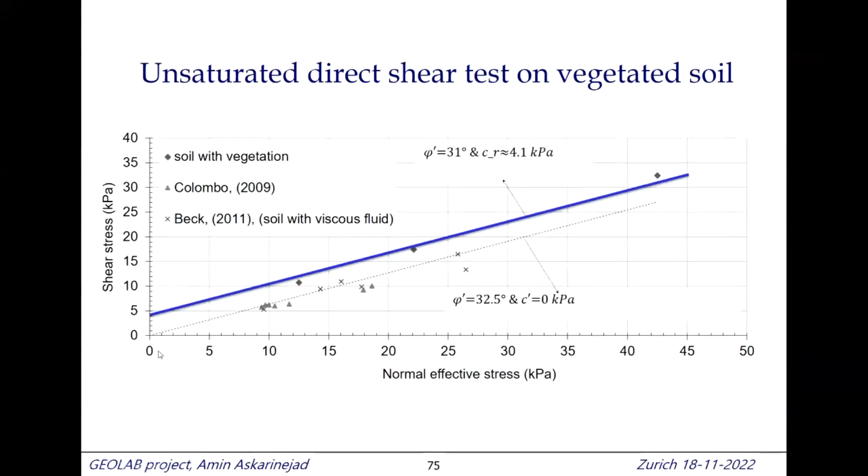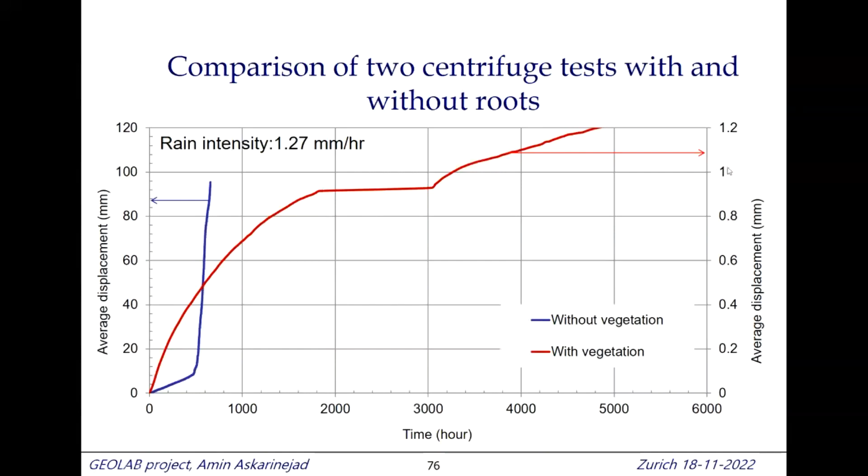You can see that I went all the way to around 2,000 hours of rainfall, again in prototype scale. Then I needed to wait because all the water was gone. I had no more rain, so I needed to stop the centrifuge and fill up the water tank. Then again, you can see there is a tendency to increase, increasing deformations, but it's really slow compared to the slope without vegetation.

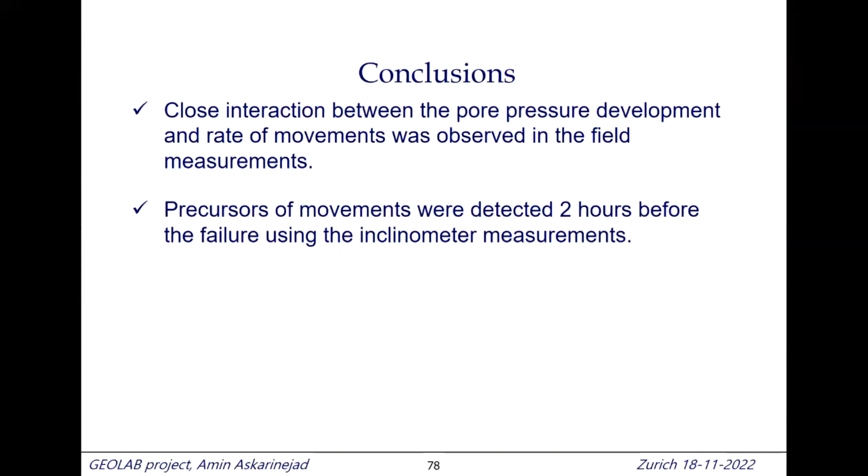This is the last slide. Generally, we saw a very close interaction between pore pressure development and movements of the slope in the field. So if you want to design an early warning system, I strongly suggest combining these two together, not only measuring deformations but also pore pressure changes. We could actually see precursors of movement about 2 hours before the main failure. Normally in literature, you read that for these types of slopes in silty sand you get a sudden failure, but that's not true — you can get information before that.

The other point is the interaction between the bedrock and the slope. In a lot of publications, and unfortunately in a lot of governmental offices, when they want to develop hazard maps, they assume the bedrock is parallel to the slope. But in reality it's very rarely the case. What we saw was that the shape of the bedrock, and the hydraulic interaction between the bedrock and the slope, made a huge impact on the slope's behavior.

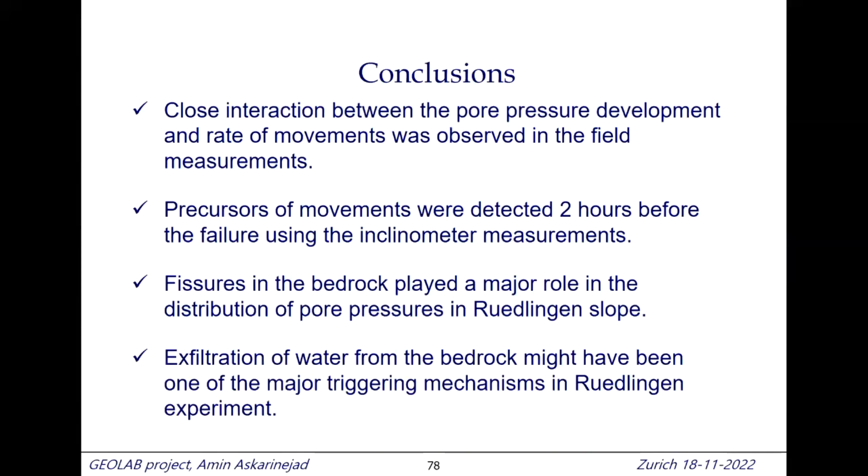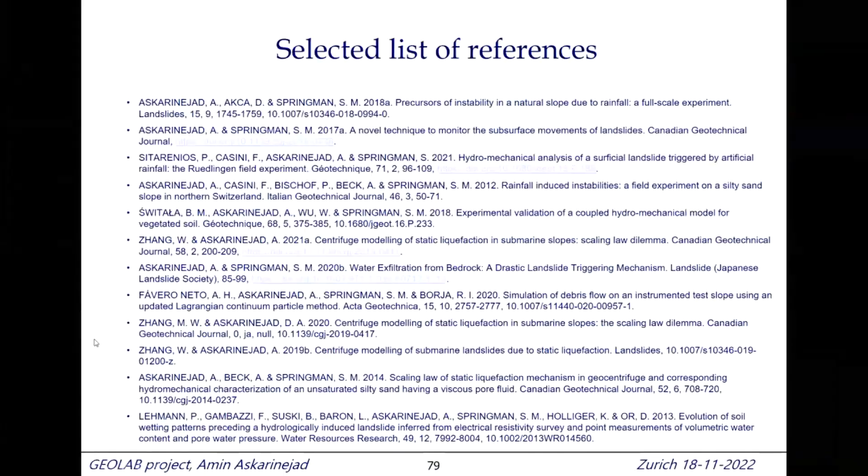I've put a couple of references, and I've given the slides to Alex, so you can have them. If you're interested, you can read further, and if you have any questions, you can email me or ask now. Thank you very much.

Thank you. I think now the audience knows that to be a good physical modeler, you not only need to be a good geotechnical engineer — you should also be a mechanical engineer, a photographer, and maybe a farmer too. So, because of time, I think we'll save the questions for the end, and directly let Dr. Stefano start.